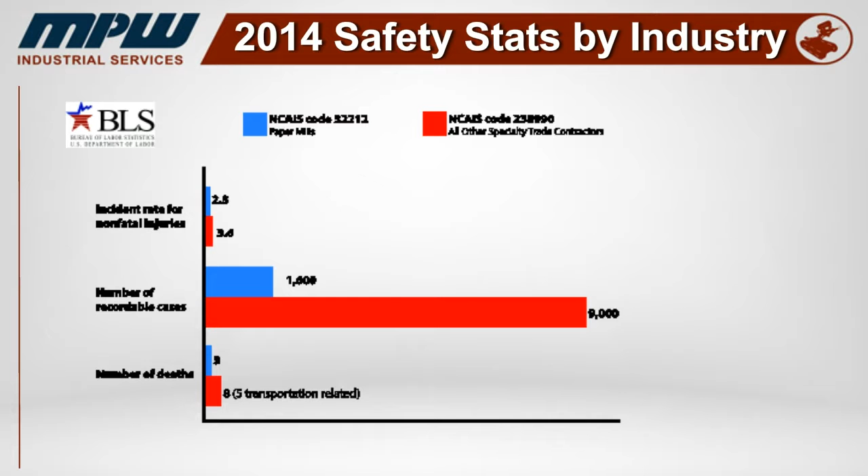Again, we are working in a hazardous environment and want to find ways to do it safer. Some of the benefits of automation: the tooling can assist with keeping workers out of harm's way and decreasing safety and quality related incidents. Through hands-free operation, you eliminate the need for workers to enter potentially dangerous spaces. On the automation and tooling that has cameras mounted on it, you're able to pinpoint the location of obstructions or any fouling, and you're able to increase efficiency and decrease downtime with tooling.

The robots don't have to take a break like people did. So when you're able to use robotics and automation and hands-free tooling, you're able to work 24/7 to get the work completed. And when there's a camera or monitoring device on the tools, we're able to get detailed and consistent monitoring, and potentially even video of that work that we're doing.

As you can tell by the title of the presentation for today, the focus is going to be on recovery boilers. But as we go through these, I will mention that all these tools have application outside of the pulp and paper industry as well, in the utility industry, the steel industry, metals, refineries. So these tools are not confined to recovery boilers; they're also useful in other industries.

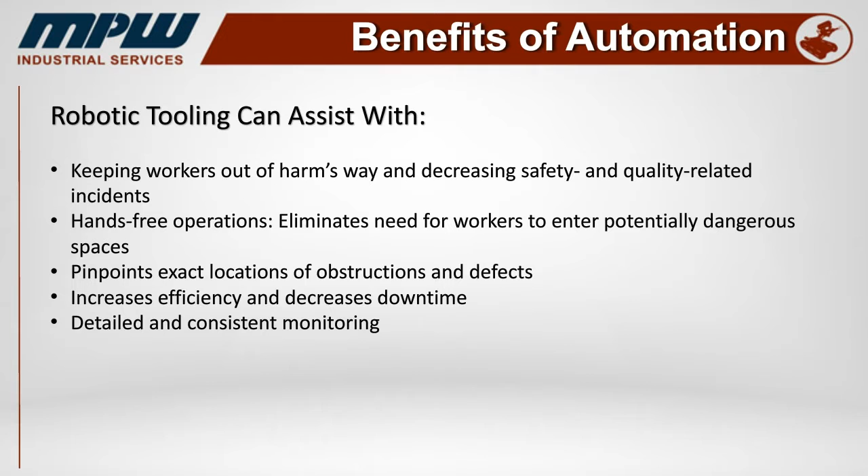These are just some of the tools, some of the automation that we have here at MPW and available to us in the industry. There are certainly other tools that we have that may not get mentioned today, and there's also customization possible. We'll go through some case studies at the end, but there have been situations where we've been faced with a challenge to come up with a solution for a customer where maybe the tool didn't exist. With our engineering department here out of Columbus, Ohio, we were able to put a tool together and design and build a solution for the customer.

So we'll start with the upper furnace. These first couple are split into the areas of the recovery boiler that the tool is most useful for. This is what we call our cable crawler. It's intended to be used in the upper furnace, the back pass, and potentially under the nose if there are entry points. This is for the removal of salt cake fouling in the tubes. This can also be a vertical run, not just a horizontal run on the boiler walls, for any fouling on the walls themselves. This particular tool is an indexing 2D, high volume, high pressure rotating head across the boiler.

It moves via suspended cables, hydraulically controlled from a power pack outside the boiler itself. Again, we're keeping people out of confined spaces. It's got a servo motor driven unit.

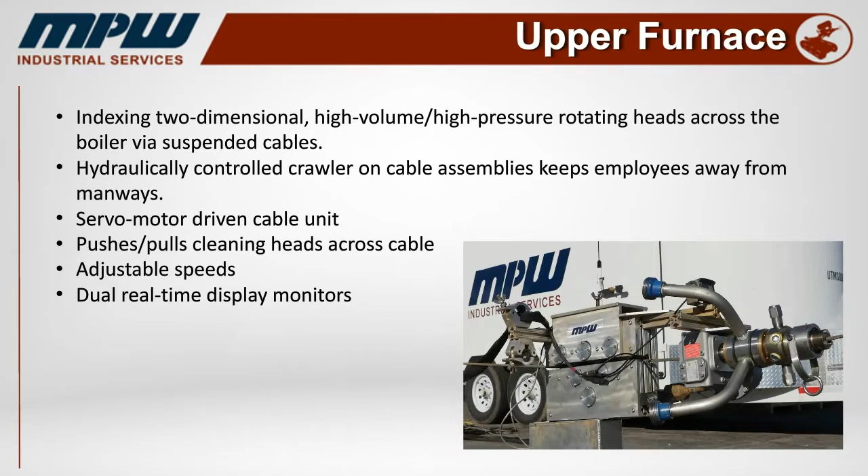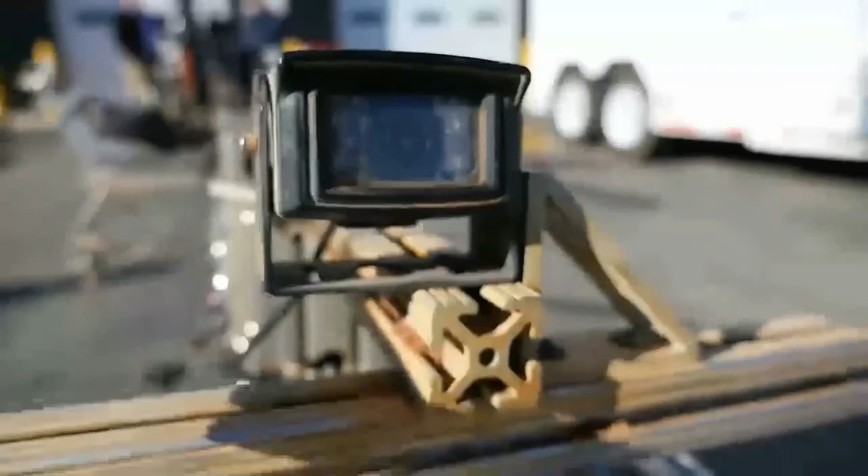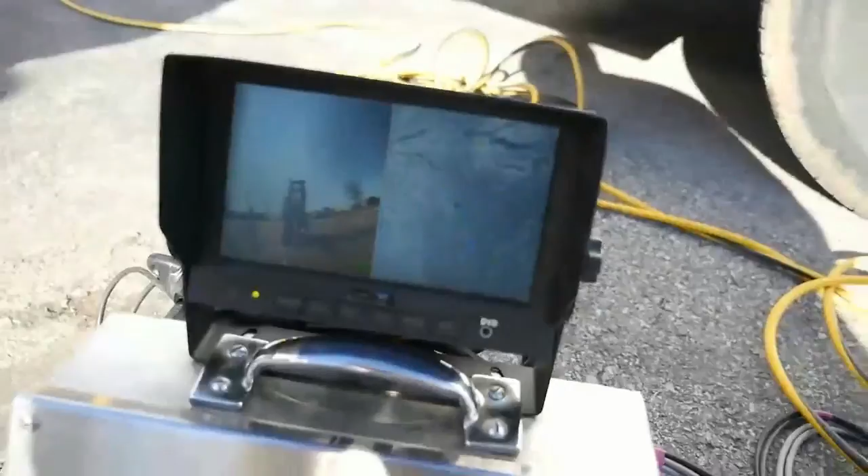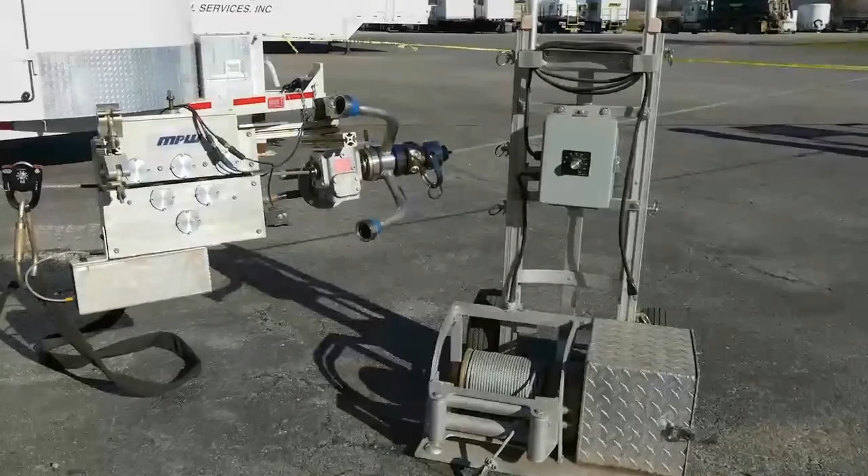The next slide is this video here, showing some of the specifics of the cable crawler. You can see some of the cameras mounted there, and there's the control box with forward and reverse. You can control the speed and use the monitor to see where you're positioned. That tool just crawls along the cable. It's got an automatic mode that'll keep the head moving, or you can stop it and work on one particular target area.

Next slide is our Smelt Bed tool. There are actually 2 services we provide when it comes to smelt beds. One is smelt pumping services, for boilers that may not have a sloped floor. It might be a flat floor where smelt stays accumulated even after the boiler is brought down, and we're able to pump the smelt out and into a dissolving tank below. Basically that cools down the recovery boiler faster and enables us to get our water blast tools in there. It also cuts down on the amount of water blasting that has to be done.

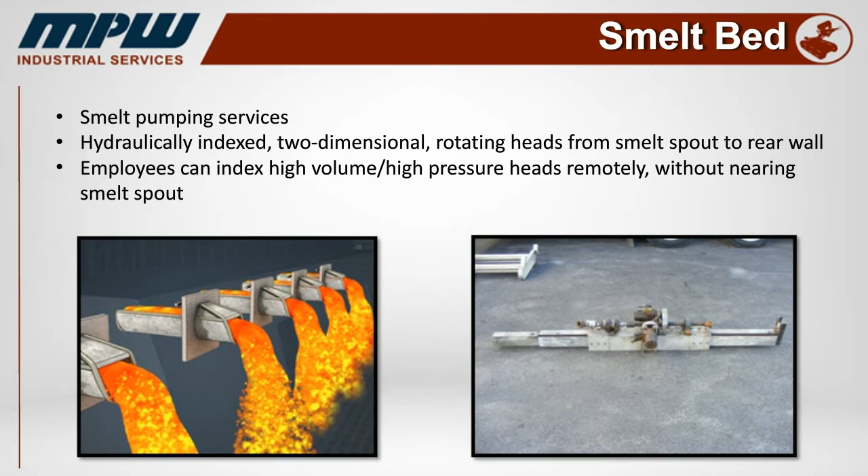Some recovery boilers that have a sloped floor may not need to have the smelt pumped. So the tool to the right is our actual Smelt Bed wash tool. That's a hydraulically indexed 2D rotating head that goes on the end of a rod. The rod is shoved into the boiler all the way to the rear wall, and it's pulled back to pull any smelt that's built up on the boiler floor through the smelt spouts and into the dissolving tank. We can angle those to hit some hard to reach areas in the corners.

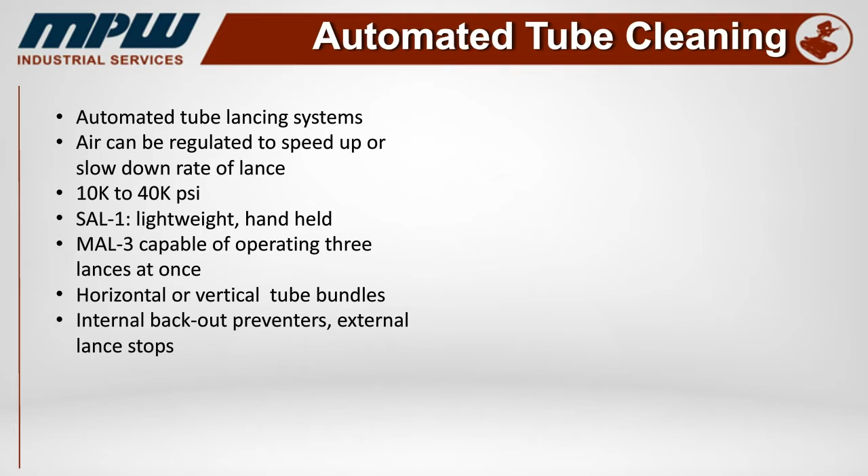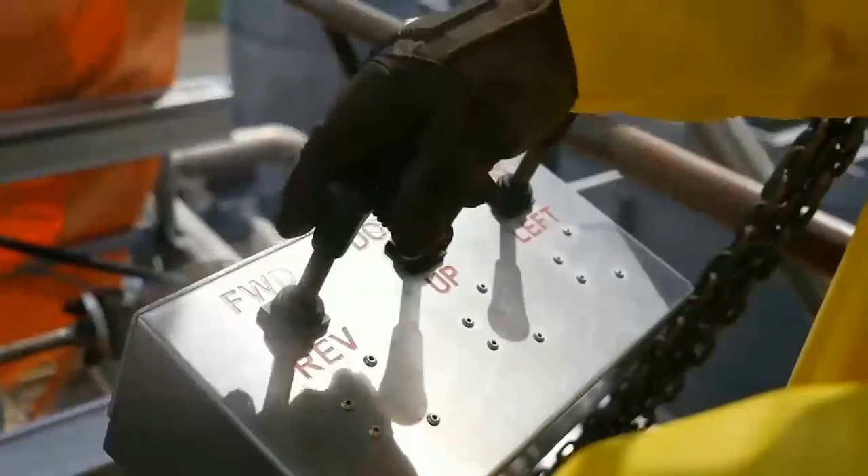These next 2 slides are about this particular tool, our automated tube cleaning set of tools. We have a single lance machine and a multiple lance machine, the SAL 1 and the MAL 3 that you see up there. The single lance machine is a handheld device that's able to drive a lance in through tubes and out. The one you see here on the video now is the multiple lance machine, the MAL 3, so you're able to run up to 3 lances at once through any kind of tube bundles.

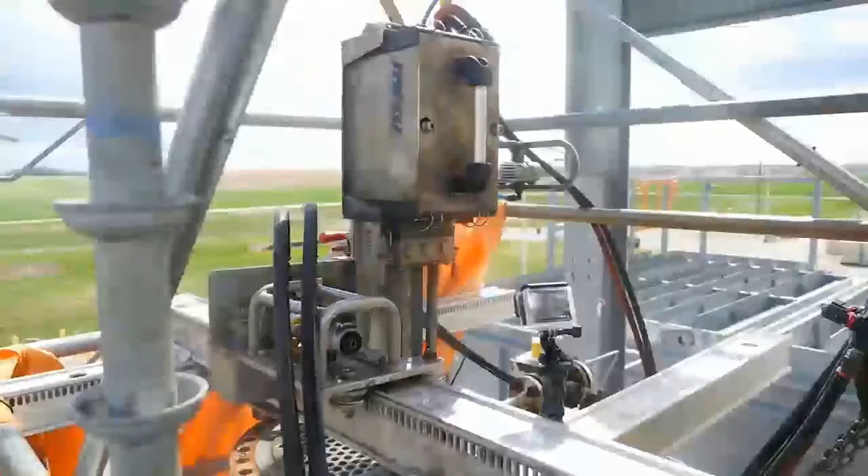The application in the paper mill is on the evaporators. You can run 10K to 40K psi depending on the degree of fouling you have, and do horizontal or vertical tubes for condensers or evaporators. It's got back out preventers and hands-free operation, so our people are able to stay away from the blast zone at the end of the lance. You can also speed up or slow down the rate of the lance, depending on the type of fouling you're dealing with, to get some of the heavy buildup off the inside of the tube.

One application for a multiple lance machine would be a tubular air heater or gas-over-tube air heater in a recovery boiler. Multiple lances can be used to reduce the dangers associated with a limited work area in a confined space. The MAL-3 is attached to an XY positioner so you can do horizontal or vertical tube bundles. You can see in this picture the XY positioner controlling the location of the multiple lance machine and driving the lances in and out.

It's air powered, and you can use it on tubes of varying lengths and sizes. You can also use different attachments, heads, and nozzles depending on what kind of fouling you're dealing with. Typically in a tubular air heater in a recovery boiler, you're going to deal with salt cake buildup. A lot of times it's water soluble, so it can be pretty easy to wash through, maybe even with a fire hose. But there are times when you get some pretty heavy fouling, and if it's been a while since the tubular air heater has been cleaned, you may need to lance that area.

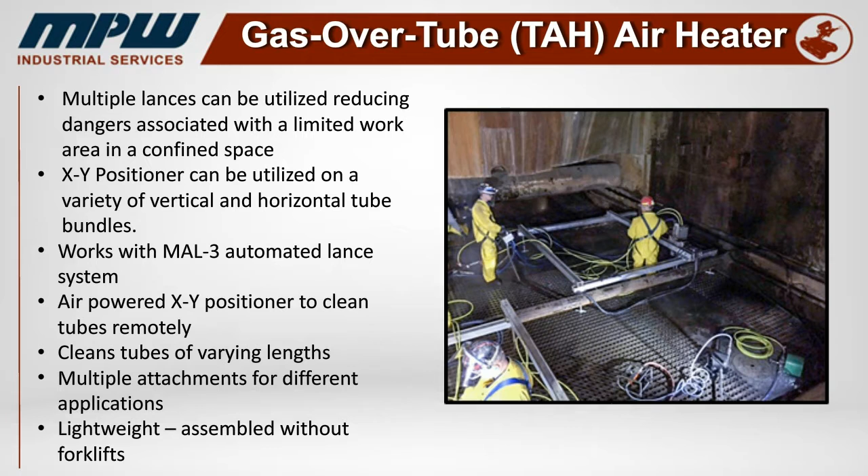Here we have our line cleaning auto box. This auto box is very similar to a single lance machine, but it is not handheld. It's fixed to either a stand or the hitch of a truck, and you're able to feed the hose through this box and clean lines. Typically it's larger lines than what you're able to clean with a single lance machine, so you'd use the auto box for applications like green liquor lines in a recovery boiler.

A lot of times you get a lot of crystallization and fouling in the green liquor lines.

The auto box is air powered. It's got a remote control device so that the person can stand away from the end of the hose. Typically this was done with a guy standing right at the end of the hose, right at the beginning of the line, and if that hose hydraulically pushed itself back out, there was certainly a lot of danger here for a water blast injury.

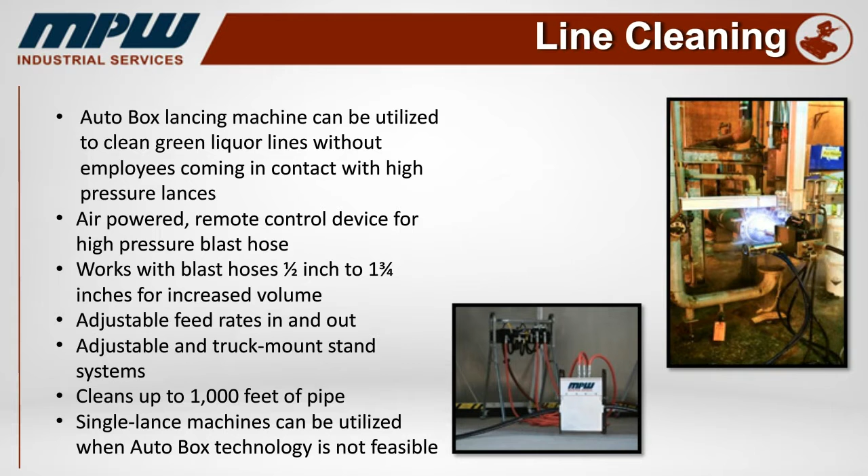So in this case, it's actually got a back out preventer. You attach that to the end of the pipe that you're cleaning. You insert the lance, and then the lance and the auto box do the job. It'll clean up to 1,000 feet of pipe, push and pull the lance in 1,000 feet, and again you're able to adjust the feed rates in and out. And it can take hose from anywhere from a 1/2 inch to 1 3/4.

Okay, this one's one that we're pretty excited about. This is what we call the M1 RV remote vacuuming system. There's two different models here. The one in the top picture has a serrated snout on the end that's able to have water blast and fire hose nozzles connected and attached to the front, so you're able to vacuum and blast. The one pictured on the bottom is an auger attachment, basically on the same base, so you're able to get harder material with the auger attachment, so a lot more solids.

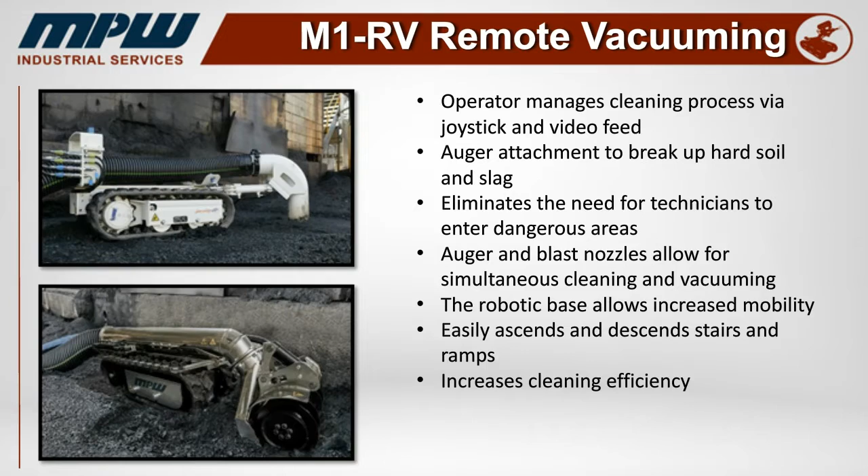The operator is able to clean with the joystick and a video feed from the outside. This is really good in a tank environment. We do have a case study at the end that we'll talk about where we used the auger attachment to clean a white liquor tank that was tied to a recovery boiler. So that was, again, pretty exciting. This was something that you're able to go in and clean at some pretty hot temperatures as well as hot chemicals inside a tank, and you're able to remove the human element.

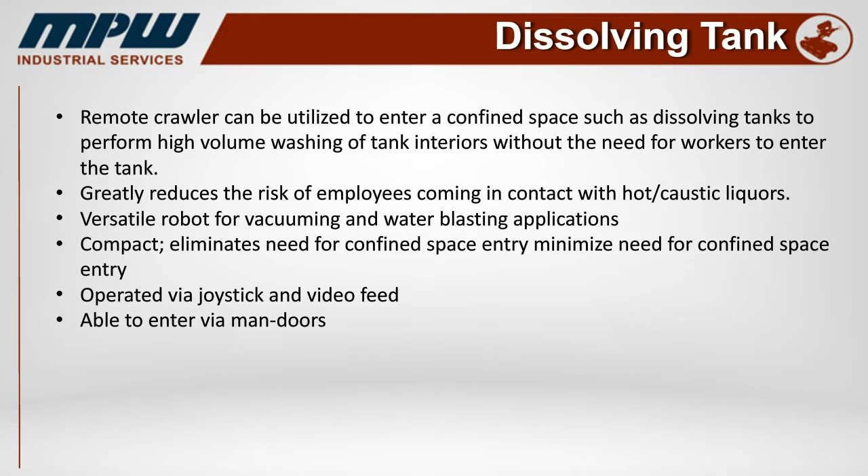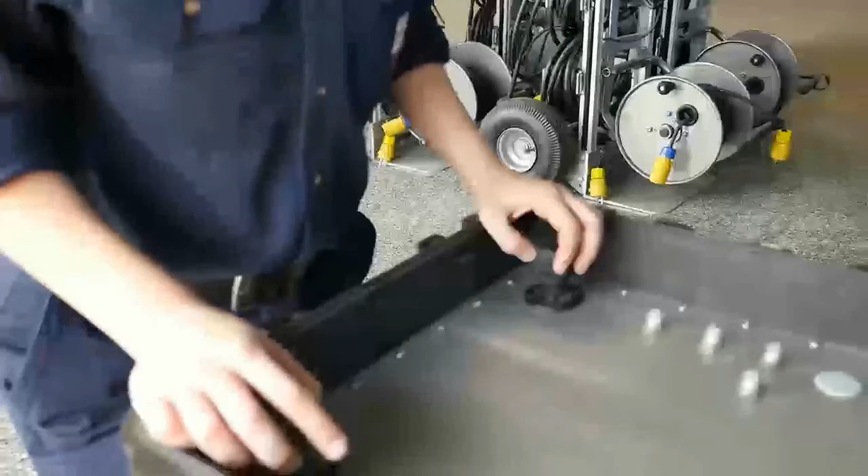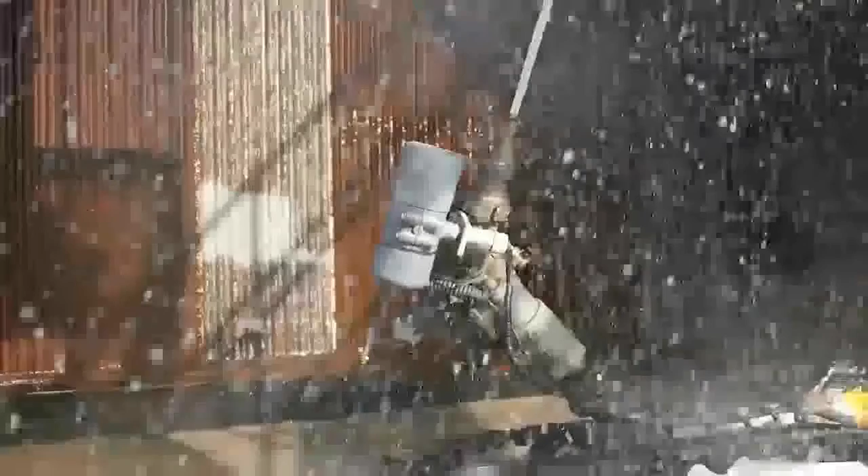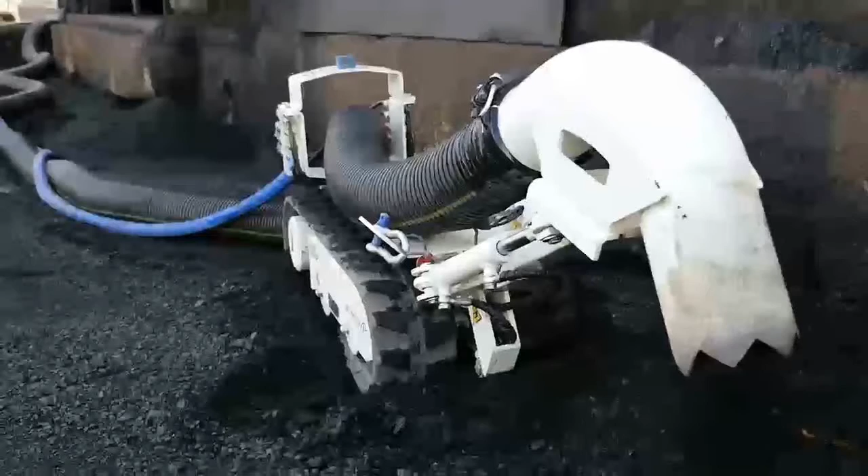The next one's the dissolving tank. This is another remote crawler that we have that's basically either a water blast or fire hose attachment on this crawler. So this is not the vacuum crawler. This is a little bit smaller. It's able to get into some smaller environments and smaller tanks where maybe the other crawler doesn't fit. Here's a picture of the crawler that we have with the serrated snout on the end.

Kind of gives you an idea of the environments that it's able to work in. These are all, again, operated via joystick and video feed from a distance or outside a tank, so no one has to enter any confined space. They're able to enter, all these crawlers are able to enter a standard man-door into a tank. Okay, so a couple case studies here to go through.

The first one is actually for a power boiler, but this sort of demonstrates the usefulness of the cable crawler. This was at a Florida pulp and paper mill. They had a challenge cleaning some dangerous areas inside their power boiler, and typically this had been done in the past, very time consuming. Scaffolding had to be set up. It was dangerous. We had to use a short barrel water blast gun, issue a variance to use that short barrel gun, and people had to go in and work in a very tight spot to be able to blast the material from between the tubes.

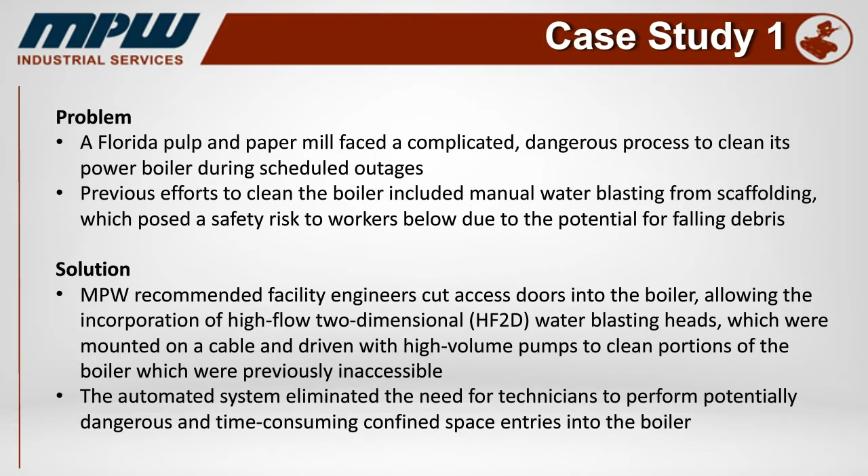We worked with some of the engineers and maintenance folks at the mill, and they actually cut 2 access points, one on each side of the power boiler, and we were able to run a cable across those access points and put the cable crawler on that. Instead of taking 40 hours to set up scaffolding and clean in the past, we were able to get the job done in 16 hours and save about $37,000 for the customer. We were also able to deliver a better clean. With the heads, we were actually able to reach some areas that were not reachable before with the scaffolding and traditional water blast gun use. So we eliminated the safety concern, saved a lot of money, and did the job more efficiently.

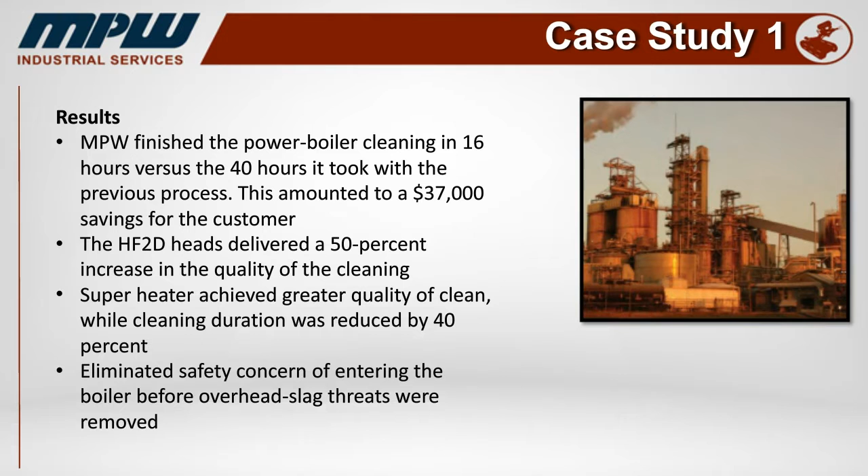Okay, the second case study, this is kind of the one I was referencing before. This involves a crawler, and this was at a pulp and paper mill in Virginia. Again, this is kind of why I get really excited about the crawlers, the vacuum crawlers that we have. We were able, this is, I think when you're looking at this video that we're going to see here in a second, you can think dissolving tank on a recovery boiler or any tank. This tank in particular was a white liquor tank, so again, very hot chemically and very hot temperature-wise.

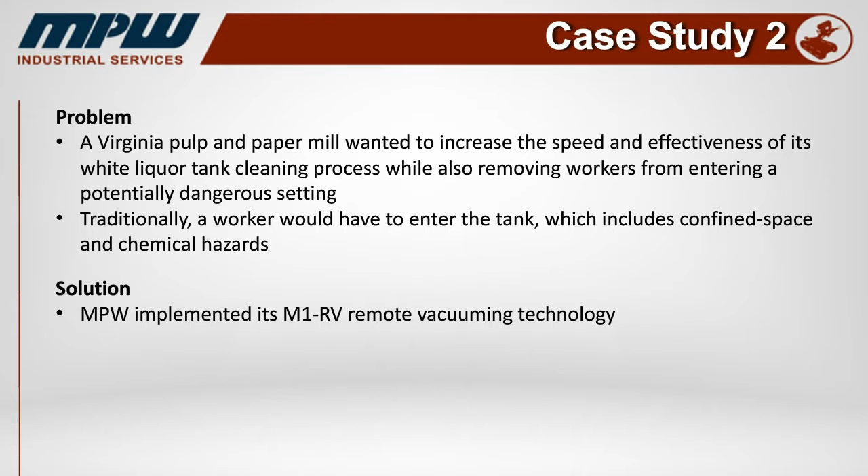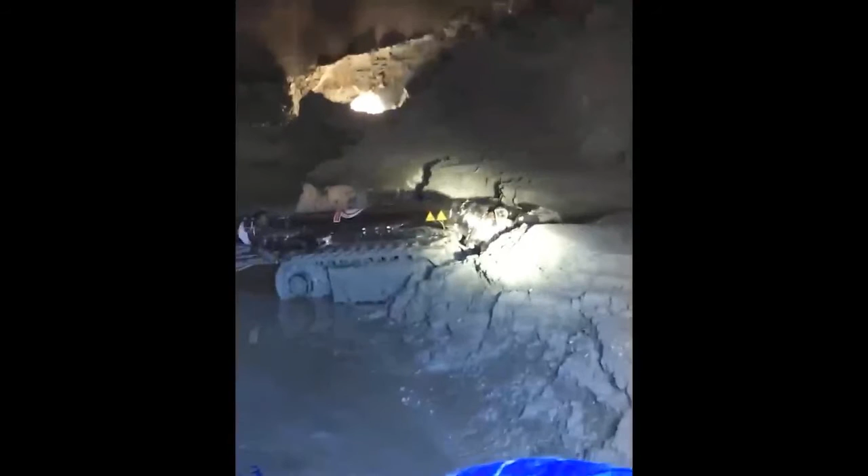The issue was getting this tank clean in the past always involved high dollars. It involved cutting a manway into the side of the tank, and they used a bobcat to try to get the material out, and then they would repair the tank. So very costly. We were able to, without any cutting being done on the tank, use the M1 RV with the auger attachment on the front. Here you can see a video of this. This was the actual tank from this case study.

You can see the white liquor mud there at the bottom. We spent the first day getting a lot of the really wet material cleaned up, and then we were able to go to work on the solids.

So we went from a job that typically took 2 to 3 weeks in the past to getting it done in a week, saving a minimum of $40,000 for the customer. They were extremely excited about this, and they've already come up with another half a dozen ways we could use this particular crawler with the auger attachment. So we're actually getting ready to do a green liquor tank for them here next week.

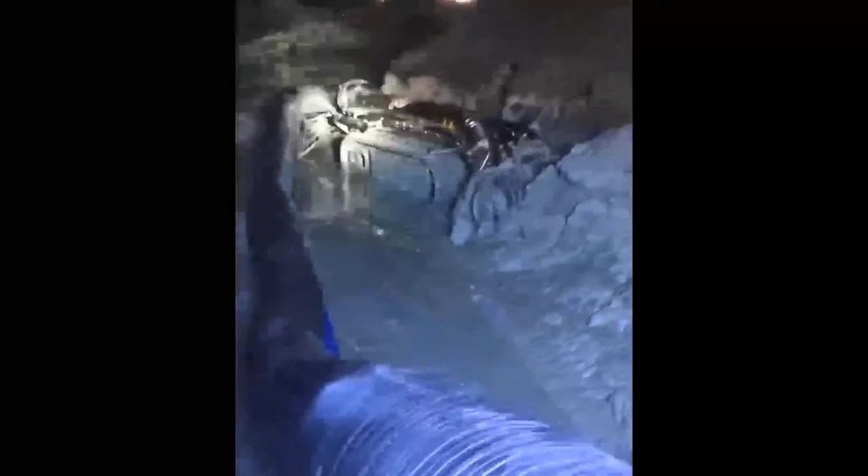Pretty exciting stuff. Actually, while we were doing that tank with the crawler, there was an avalanche of material that fell and knocked the crawler back about 8 feet. When that happened, the customer was there. I was actually there on that job. We had a conversation about what if that would have been people inside that tank. The crawler was able to back out and just continue to work on the material. So it was pretty good.

Before I pass things back to Paul here in a second, I want to issue a challenge, a safety-based challenge to anyone on the call that comes from a pulp and paper operations background. If you're working for a pulp and paper mill, if you're one of the owners or operators there, here's the challenge. We've seen more success using automation when it has been embraced by the owner, when the customer we're working for embraces it and says, I want to see this, I want to see how we can use this, I want to see people be safer, people out of harm's way. When we have some customers, believe it or not, that say, this is the way I've always done it for the last 20 or 30 years, I know it works and I don't want to change it, it can be a challenge for us to introduce new ideas.